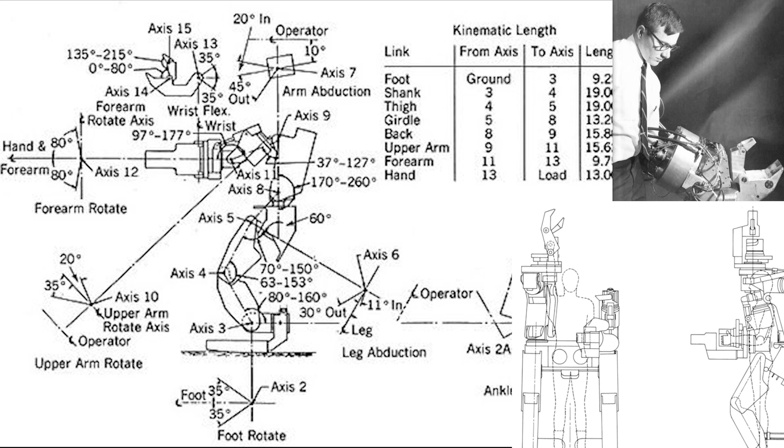My name's Matt Dickinson. As a quick reminder, we are working on the Hardiman project. We are looking at bringing back the famous original exoskeleton.

I've got a couple of things to share with you from my personal research on this project, some really interesting things I never even realized, and also some comments that I've had. One comment I'd like to share, which hopefully appears here, was my favorite quote of the week: 'the OG EXO from the past' - the original gangster EXO. This is very true, it is the first powered exoskeleton that I can find record of. There's a couple of comments about the man amplifier, but from what I can see, the Hardiman is the very first. Definitely my favorite quote of the week, really made me smile when I saw it. I've obviously blanked out the guy's name, but yeah, phenomenal quote.

Anyway, as ever, I'm just moving things around on my other screen.

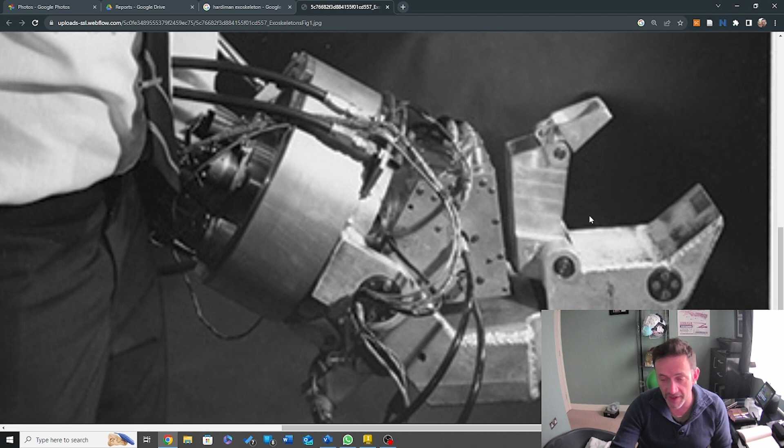I'm going to do that cut, but you've got to remember what we're trying to do at this point is we're not building this from scratch. What we're actually doing here is just trying to establish the size of things. Once we get an overall design together, then we'll move to the next iteration, which is fine-tuning all of this - nuts, bolts, positions. These, by the way, are assembly caps - they've been put on, and they've assembled the actual piece and used an assembly cap to push it into position.

This is because the front of this will have probably been detachable of some type, so you can get in and actually work on the linear actuators, or servos, underneath. So yeah, it's there, but it's something to consider.

Right, so let's get to action. If you followed me last week, well done. Let's take a bit of a reminder. Let's go around the actual hand and take a look. Again, we are not doing the master hand yet, the slave hand needs to be right. You know what, I thought that was going to be quicker. So slave hand needs to be right, so let me just update on this.

And again, if you... oh yes, somebody did post a question, well actually emailed me a question, when I'm referring to the system I'm using to navigate around, my space mouse, what is it?

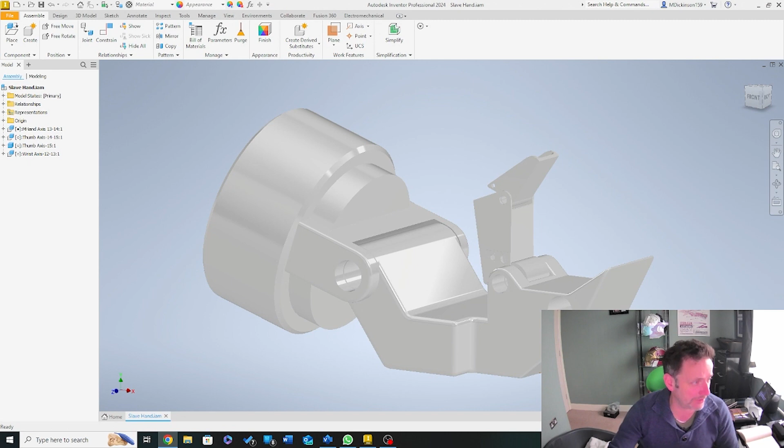So let me just show you an image. Once I show you these images, a lot of people go, oh yes, I remember. Right, so this is the one I'm actually using. Now I'm using this one, and mine's still, well, mine's a really older one, not as sophisticated as this. They've now got mobile wireless ones. If you don't own one, I'm surprised - these are insanely good for what they do. This is what allows me to do this and move around and have a little bit of a gander and look in here, look over there, move over here like that. It's a great bit of kit, and if you've not got it, I would strongly recommend, if you can, to buy one. They are phenomenal.

But the worst thing is they are not the cheapest thing in the world. When they first came out, they were peanuts, but like anything, you kind of go, yeah, when it first came out. Ha! Okay, so let me not digress too much.

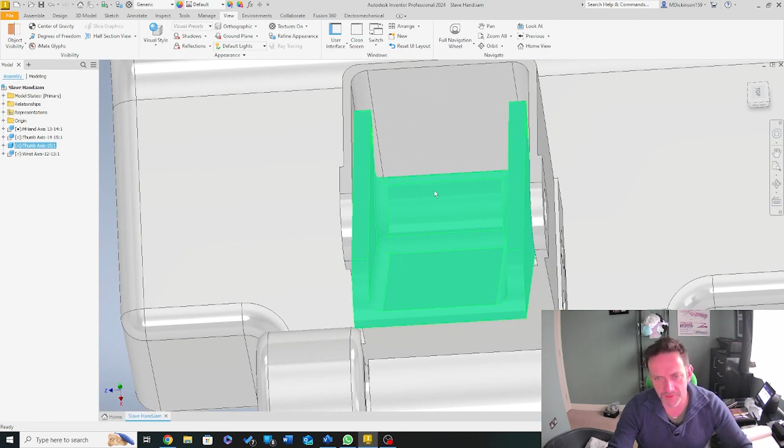Right, see my thumb here. I think this is going to need cutting out. Looking at some of the key things about this, I think this is going to need cutting out, and then this will have a swing arm here that will allow it to push and pull, giving it the full linear actuation servo aspect to it. I think that's what it's going to be, and then what you'd end up with is a bearing in between of here, and then that will allow the thumb to go backwards and forwards smoothly.

However, at this point, no bearings. All we're doing is just getting this into position first. So what I'm going to do is quickly swing back to my original, because if you remember, I've done the slave hand as an assembly, but then I've done the master hand.

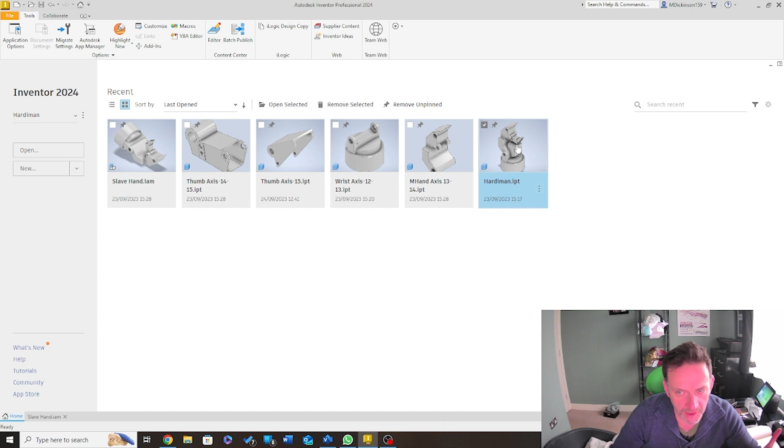For those of you who know my class, those of you who know me, you will know that I know this as base parting. It is known as a lot of different names and different aspects, but it is, for me, known as base parting.

So let's just take a look down. We see here, this is where we were smart. So if I come to here, and if I go... and now all I need to do is make these non-visible, or invisible. I know, yeah, I think I'm funny, so don't judge me.

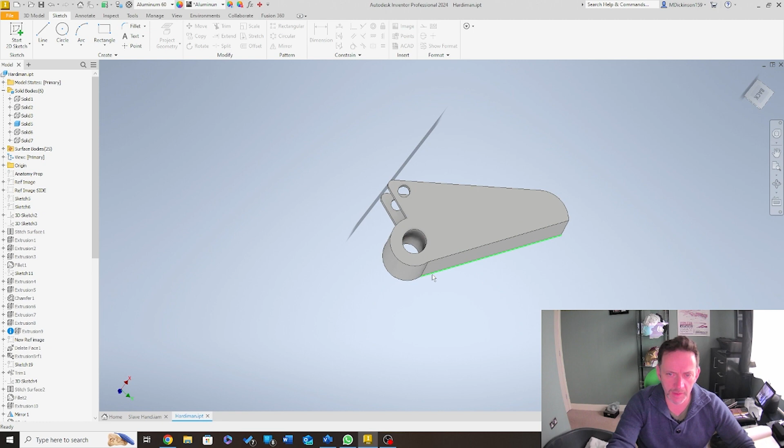Right, so what I'd really like to do is create a plate at this point, see, here to here, this is dead easy. And what I'll do is, I'm just thinking actually, the length of this thumb, I suppose it doesn't matter, because that's going to be an adjustment anyway. I am going to, before I start chopping that thumb back, need to check it first.

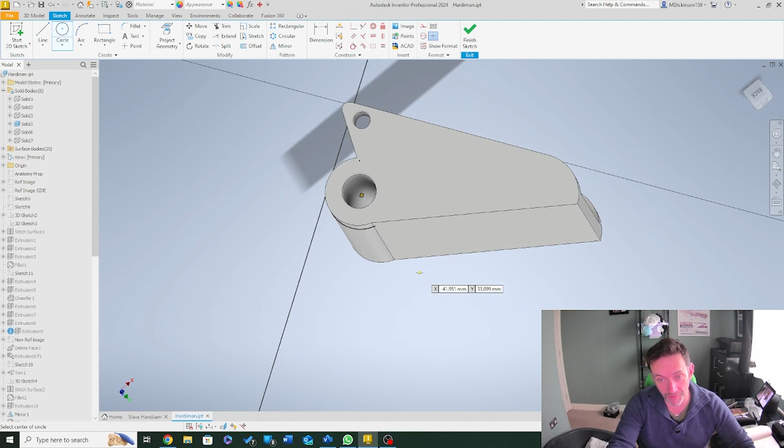So I'm just going to do a sketch onto here, and what I will do is try and find where the hell that went. There we go. This is because technically there's other things on here that obviously we don't see, but because we were smart when we engineered this, it's on there, but it's saying, oh, I can see this, and you kind of go, yeah, no, but I don't want that, and it's looking as if to say, well, do you want that? No, I don't want that. So that's all this is really doing.

Now, it's interesting here, you see how this flows in between. I'm probably going to suggest that I'm going to cut this right back, do an extrusion right back, and then perhaps put a fillet on it.

You gotta remember at this point, I am making that bit up, and I hate saying that because it just feels like a real fudge. In many ways, what I'm doing right now is a fudge, which I hate. Anybody on the channel now, you'll be thinking, do I really want to be connected to fudging it? Not really is the answer.

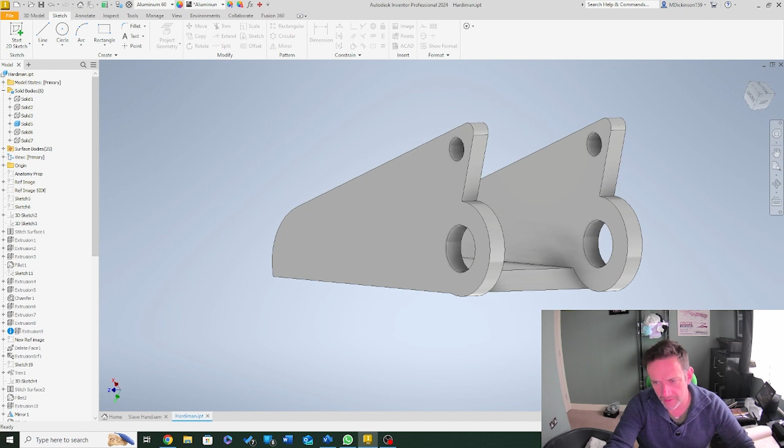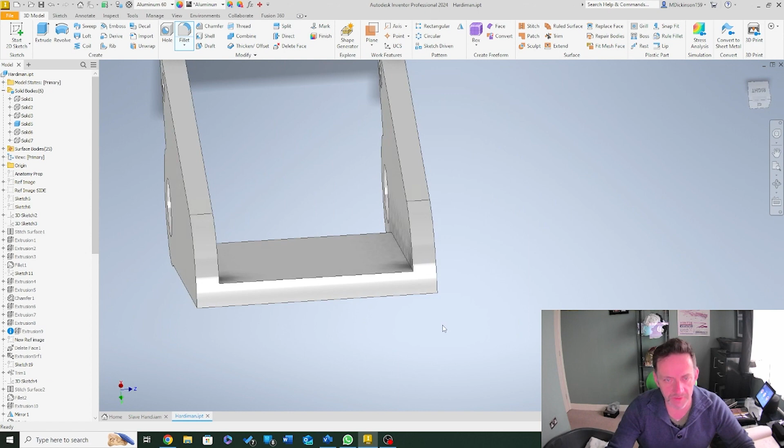But that is what I think we should be looking at, which is them two plates in between it. The one thing I know for sure is the thickness of the overall would have been the same. There's no way they'd create multiple thicknesses for a single part. They were smart in the 60s, very smart, but they also tried to make things as easy as they could in some aspects. I'm not saying any of what they were doing was easy, because it wasn't. But they were trying to make this so it wasn't over-engineered or over-complicated for something they really wanted to prove.

The other thing I'm still not sure about is this section here too. I do have some images for us to take a look at. These are burned, badly burned. But we've got some good spots here that we're going to use today, which are these angles. We now know it's actually a 30 plus to minus 30 degree rotation.

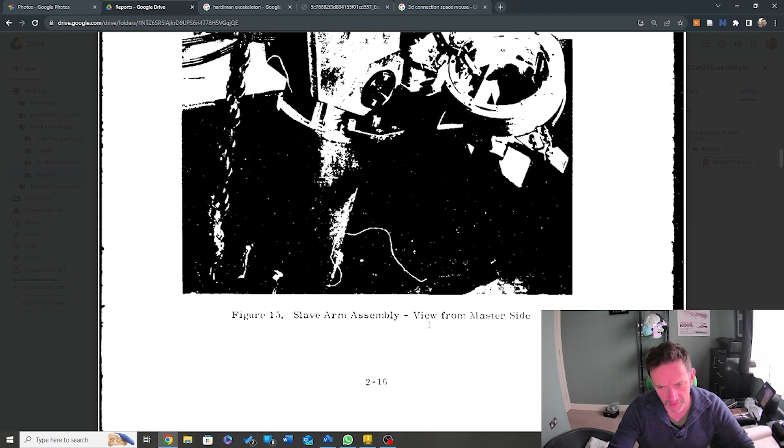What's this? Slave arm assembly from master side. We just don't get a full arm, we can't actually see much there at all. A little bit more is on here, but anyway, let me get back to where we were. So when it comes to the thumb, I'm just not sure about that spot yet.

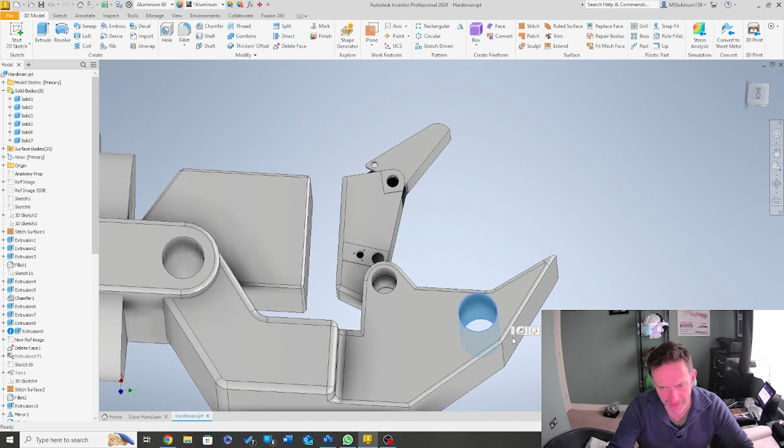Right, so let's bring everything back in. There we go, so we've got this freedom here. Now this gap, I'm going to have to try and find as many images as possible. I think any interference on this gap would have come from the linear actuator. This here, I suspect, is going to need to be sealed, and we're going to use it to break down an overall assembly.

But let me just save on there. Now you see here where I'm saving, it had to take a minute. That's because if I go to the slave hand assembly, see how the lightning bolts are down here? What this is saying is, whoa, hang on, something's changed. So if I come here, you kind of go, oh yeah, look at that. So if I just go boom, what it will do is update it, and now we've got the updated version of what it should look like. Some systems will automatically do it and keep these things live, some will not.

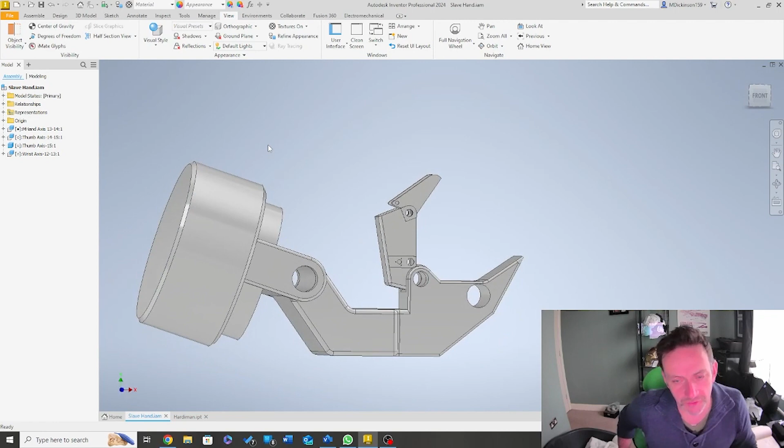This is where we are up to so far, and I just realized something else as well. Now, this was something I noticed way too late, and this bit we may need to think about. See here?

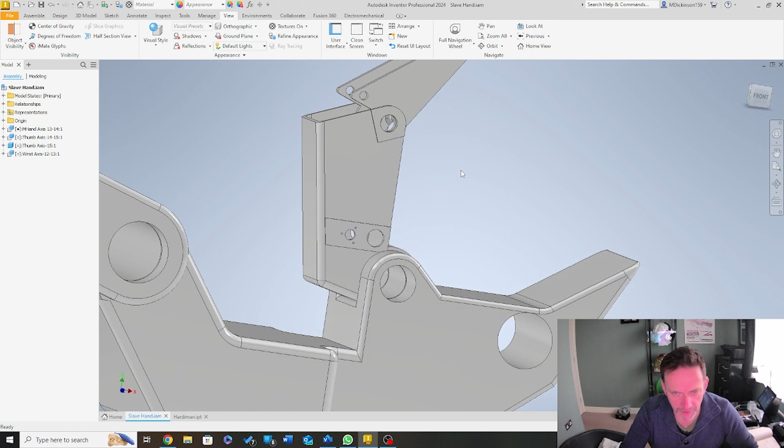Now, if we actually just take a look at the actual piece that I ended up making, right, this is the actual piece. What I did is I removed a smaller section here, because one thing that dawned on me quickly is that as we're moving forwards, the servos in this case are either sitting down here, or there's a servo sitting underneath here that controls around this axis. That's the bit where I wasn't sure, and for that I just cut that out. But I'm going to leave it there because I think that's going to promote a bit more discussion. We need to find out what them servos were to know what type of an operational window space we get.

Now, granted, in what we're doing here, even though we are recreating something which is incredibly old, to make this, we're going to use linear actuators, and we'll actually use some up-to-date linear actuators. We will have a real working version of this. However, I don't want to compromise what was actually being done here. Again, what we're doing is trying to flesh out how this was, and with more evidence that we find, we refine this and refine this and refine this.

Right, so before I start rabbiting on too much, let's get into the next phase of this. My real focus here now, and my real hope, is this.

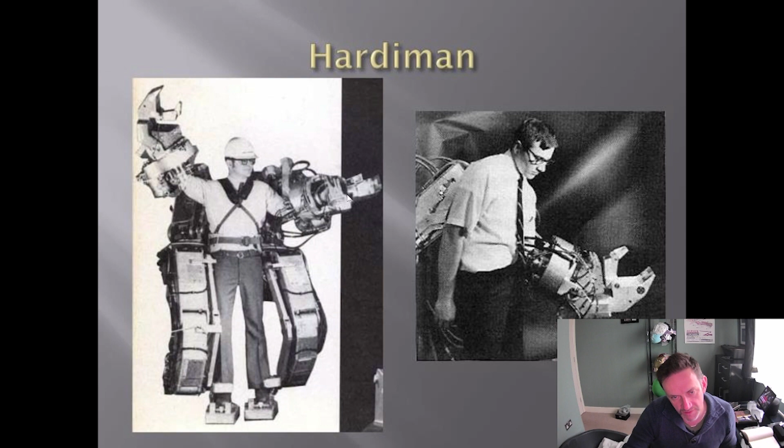Which is where I'm hoping we're going with this. Where we're going to have to go with this until we're pointed out any differently, because I think that is how it's working. I think there is a control box there, and I think what people do is they put their hand into it and it goes through that particular spot.

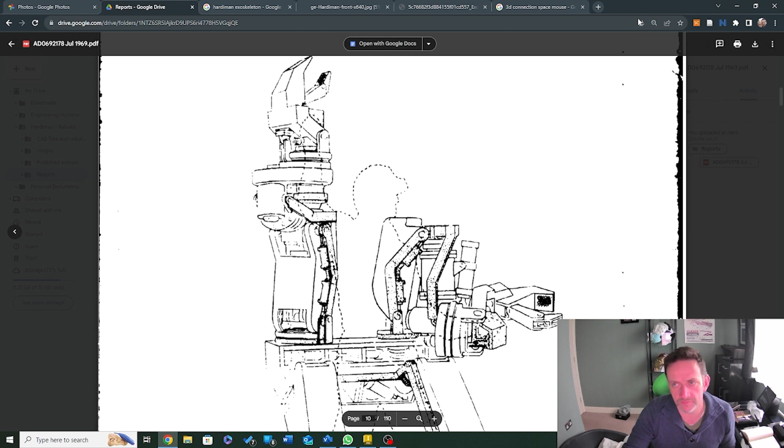So if we consider the drawing here, and this was my ultimate one on this - if I just come back, let me go into the reports, just go back to the top because this is a drawing from the actual reports, it appears quite a bit there. So if we consider this drawing, if you look there, we've got a square-like section here, and we also have a square-like section here. I think it's connected to the wrist, so I think it's actually connected to this. And I think that you've got that fuzzy bit there because it can move with it.

So based on that approach, if we just phase back to here and look at this, what we're now going to do is start to flesh this out some.

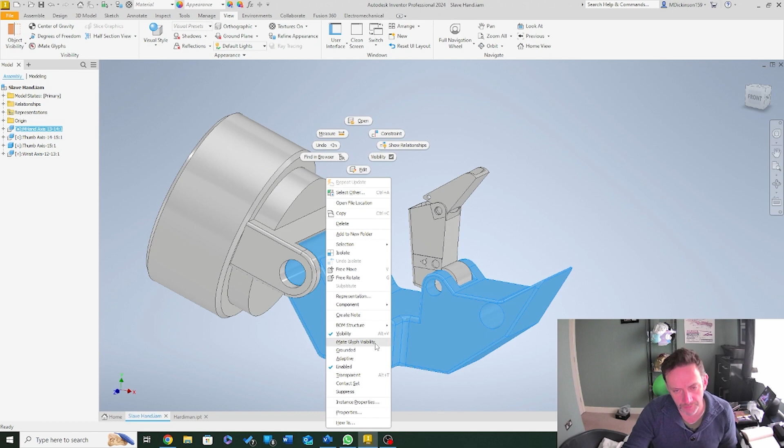The other thing is, I think these now will actually be tabs. So my point is I think this section is going to be cut out, and you're going to have tabs on each left and right. So if that's to be the case, then I'm going to move into the actual component, and what I'm going to do now is move across to my overall piece, to my centerpiece here, and then sketch.

Right, so bringing that round, and then going to project my overall sketch onto this particular edge, like that. And I'm going to bring in my component on here, and it should allow me to find the center point.

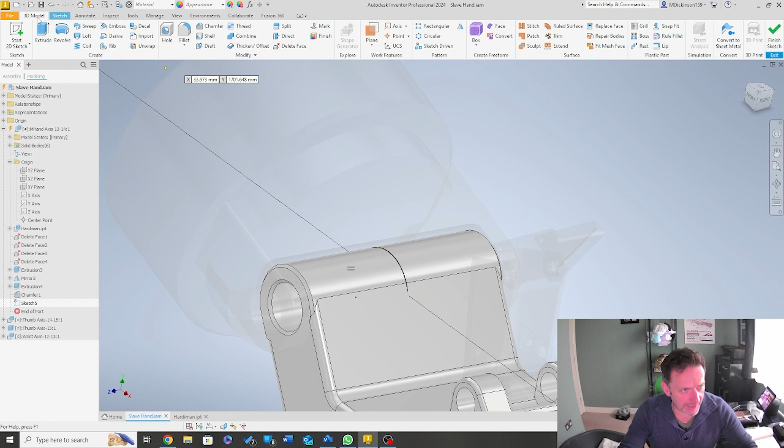I mean, really, this is going to need to be smoothed out, but it's going to be good enough for me to just get the gaps between, as long as I can control my thicknesses. Because what I'm trying to do, I'm going to maintain this just so everybody knows. What I'm actually trying to do is get an overall together, and then we start to refine.

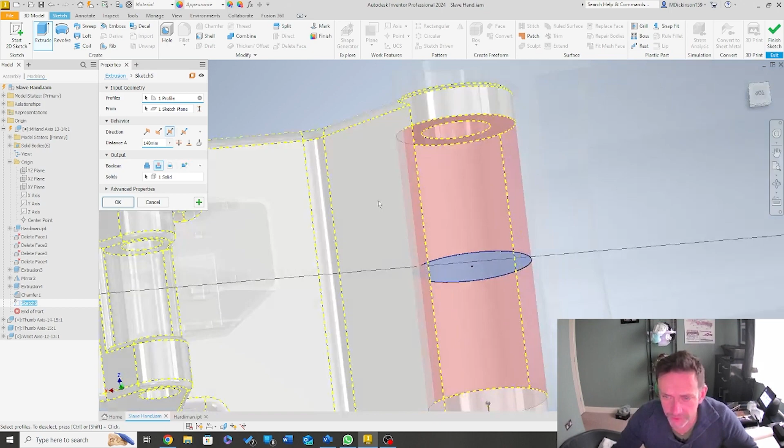So those of you watching who are UCLan students will know that I'm talking about this as a final project. What I'm referring to is getting this to a detailed design, not just a first concept design, because that's what we're doing here. We're just producing that first initial concept of the overall thing. And really, when it comes here, I may even just edit that sketch.

So what we really want to do with this design is make it as realistic as possible. We get this overall structure together, and then start to look a bit deeper as to, okay, so this works, but why? What's good for this? How could this be better? Is this a true representation, and how close or how far are we right now from the kit? Is it going to be something we can use?

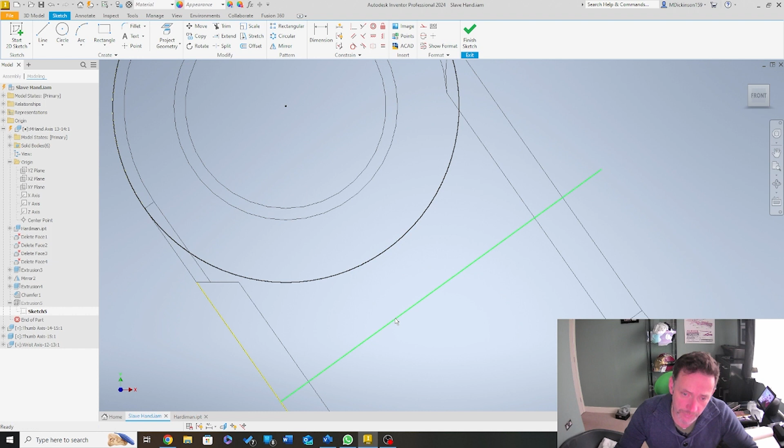Because the truth is, this as a project is going to get used. I am going to be talking about this to everybody under the sun who will listen, and I just want this to be as close to the real deal as we can. So that's why I'm spending all this time just going through this again and again and again.

So I'm just going to trim on there, and trim on there, just close it out, and then the system's going to go, you've done something stupid. Oh no, it did it straight away. Okay, so if I just tab this out and let's go realistic, tab this out, and that's where we end up here.

Now we've got this spot here. Now this is where it's going to become a little more interesting, because what we're going to have to do is figure out how this thing mounts. Because if you look across to the actual process, I can even see that I made a mistake there, but you look there, there looks to be some type of flat plate mount piece here.

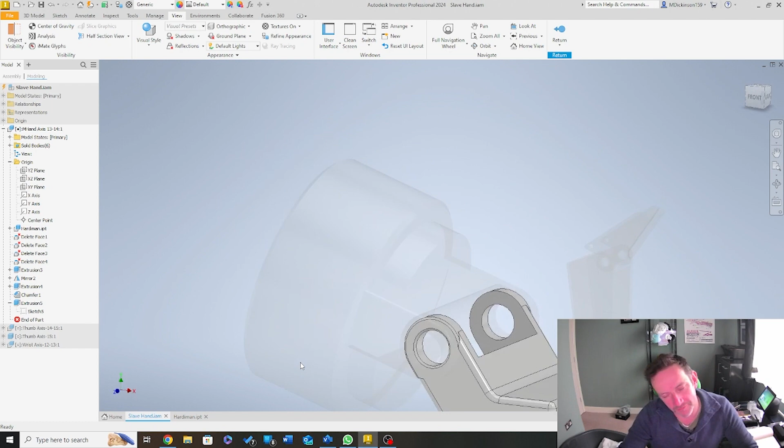It's awkward really, just because it's almost fudging, isn't it? And it's not nice, it's definitely not nice. It's caught me off guard really, just because when you look at that, maybe the decision I've just done there is not going to work as I'd like it to. In fact, I'll come out of here, and I'm just going to phase off this for a moment. I want to just go back to my original piece here and look at where this is.

So if we look at the 7th piece, that's the 7th piece. So if I hide the 7th piece, that's what we get. So go visible.

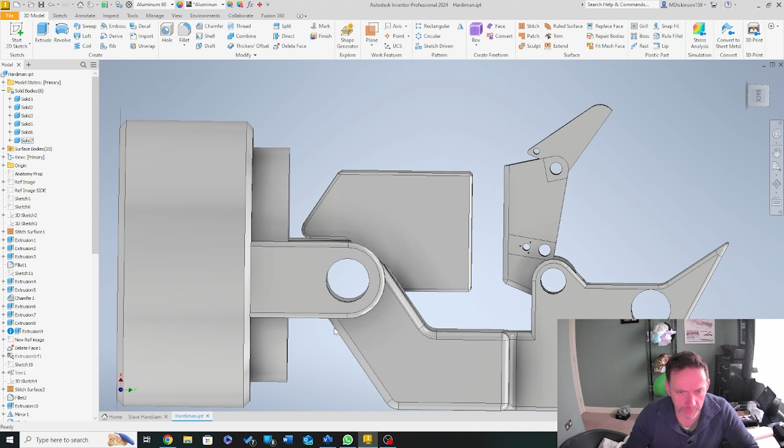Because my thought is, if you look at the actual front piece on here and you look here, what we actually end up with - I think that's why this was angled. Yeah, so if you actually look, I think that's why this was angled, because when you look at that degree between there to there, it's within that remit of its ability to turn, and that's what I think it was. And granted, what I've done here is not quite right to here, so we're going to have to make some changes here anyway.

I mean, you look at that, it's roughly to the same height as there, but it's just too far. I mean, the issue I have here is that distance there - is it too far? Is that what it is? Because it looks relatively too far for me. Does that?

Or based on there, if you look at that key particular point, is this not high enough? But you look at where the thumb sits, and I would say it is high enough. This control box is going to be a real pain in the backside in many different aspects, but it is something that does need to be right. It needs to be right, and yeah.

Looking at what I've just done here, for example, on the actual main piece itself, I think that's not right. So I'm going to come back in and delete that out completely.

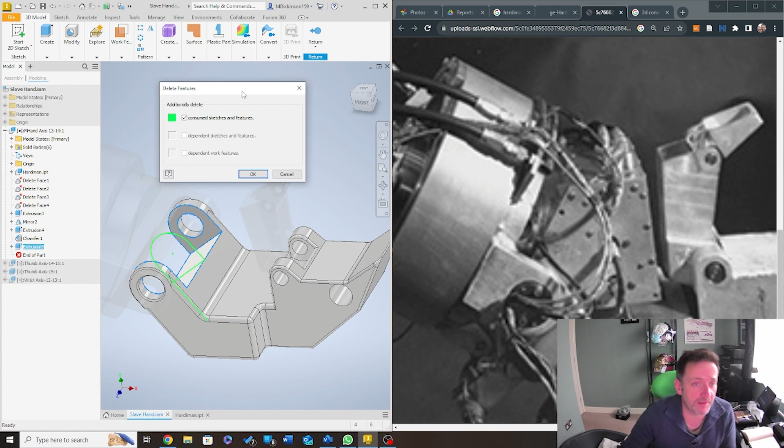If anybody's done this in SolidWorks and other things, when you delete something, it just goes, done, boom, gone. In Inventor, it says I've got things connected, do you want to delete them as well? Yes, I do, and that'll just pull everything out. I suppose it comes down to your own preference with this, but I do personally quite like that.

What I'd like to do is try and model these out a little bit further. So I'm going to come back to here, down to my actual 7th piece, which sits here. I'm going to edit this sketch, come onto my sketch, and this is the piece I'm talking about.

The only other thing we're looking at is, if you notice, this is straight, this is not. So really, on the straight, this would actually sit over here, and that's probably why it looks a little bit offside. Trouble with this shape is it isn't flat, it isn't a straight linear shape, which, I won't lie, you kind of sit and go, oh well, that's bloody irritating, isn't it? And yes, it is. It irritates the crap out of me.

So I'm just going to pad that out a bit here. I know for sure this is not quite right, it's just because when you look at it you do kind of go, yeah, okay. This is heavy fudging, I mean this is like super fudging. I don't like that, but I think these angles are here just because you can move around it, and it's to stop collision.

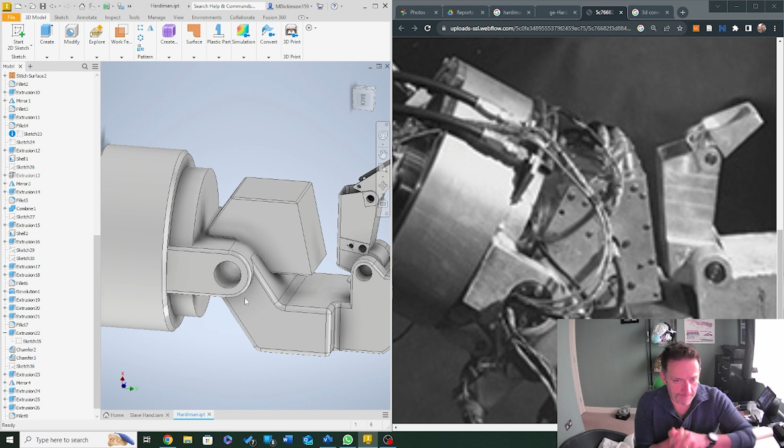So I'm guessing that's going to be the case. Right, let's do this, let's go to that next initial phase.

Oh yeah, look at that. I've just realised that comes into here and that comes over to there. That's not right either. Okay, my goodness, what was I thinking? So it's this sketch entirely here, I'm not happy with this at all.

So let's consider this, we know by lines. If we were to put this in lines, I'm going to say that was a bit of line, that would be a line, that would be a line, that would be a line, and that would be a line. Just a pentagonal shape, yeah, five, pentagonal shape. And you look at where that sits, it remains within that pentagonal shape.

So let's just check here: 1, 2, 3, 4, 5, 6, 7. Yeah, it's not the right shape. Damn, damn, damn, and more damn.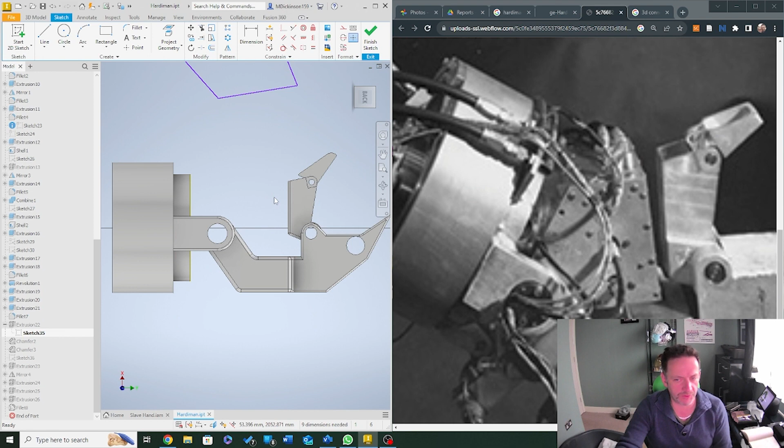Okay, so, oh you know what, balls to it. So I'm going to bring that back in, and this is mega fudging. I'm just putting that down to here. This edge will definitely sit roughly over here, this is going to sit to about here, and this is going to move down to about there, something like that.

You look here, it's still not quite. But look at that, you see that line? That says to me there's something underneath it. But I'm not fussed, it's alright, we can do that.

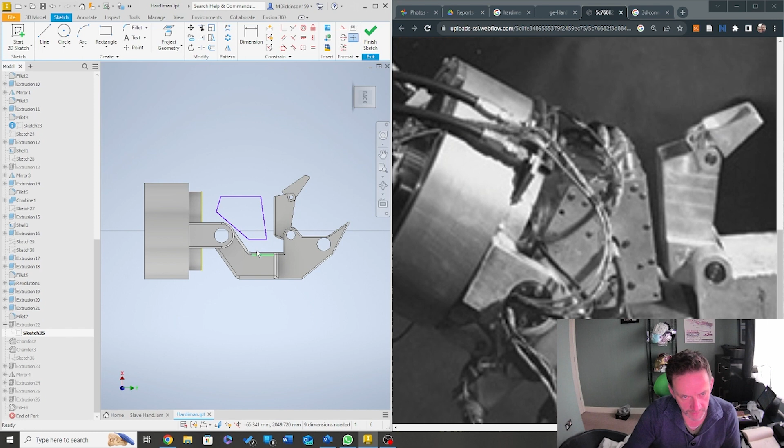So you look now, and even though that's still not quite right, it is starting to look a little bit like it should look, which is always a nice thing. Bring that in down a little bit more to there, and then bring you over here a little bit, bring you down a little bit, bring you over here a little bit, and tab that over, bring you over here a little bit, and what you should be starting to see is the overall shape.

And my arm here, oh look at that, right, see it, there, I've got it, see that arm, look at that arm, it's too long, it's way too long. There's many offensive words I could be saying right now, and I'm holding it all in. Oh damn, damn, damn, damn, damn, and more damn. Quite alright though, but it just allows me to at least see where that's gone wrong.

Bring that end to there, and then over to there. Something like that. Okay, so let's click OK on that. It's going to error out. This is just because I've now caused some major issues.

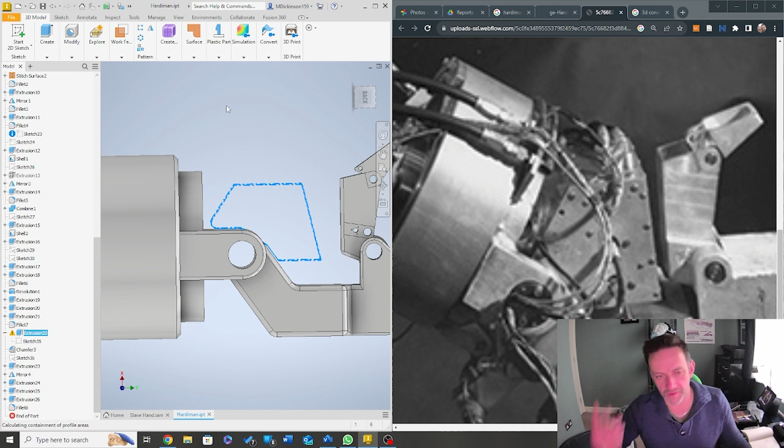It's going to come onto here, then say I don't see the sketch, I don't see what you want me to do. All I'm going to say is use that one instead, and go OK. And if we spin this out, that is what we get.

I'm going to quickly offer a quick chamfer. I'm only putting chamfers on here just to give it an overall feel for me. Looking at the key points here, let's go even lower, it's going to be the tiny little things, but just to give it some depth. And that is hitting that fudge factor. I'm just putting it on here to add them in.

Okay, so if I then confirm there, we've now got that. It's a little bit closer. I must admit, I did mess around with this to death in the past, but it is looking that little bit closer, I won't lie.

Right, so what's my other parts? These ones I'm just going to hide for the minute. I don't want that. I'm just going to hide that for the minute. Don't want that.

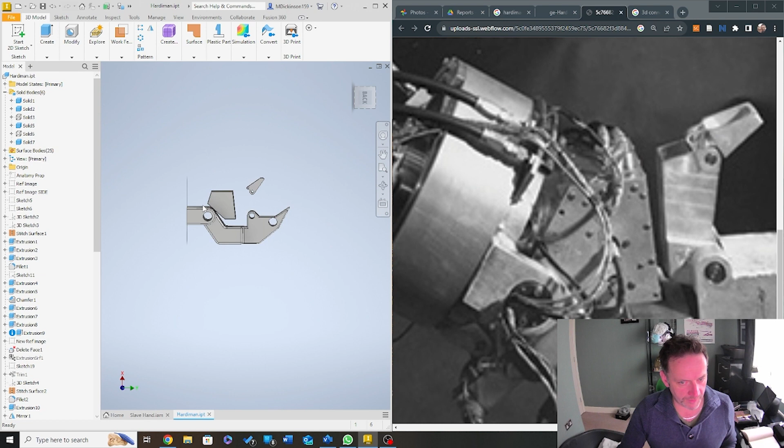That one is my interesting one. This is the one. And if you look here, the concern now is, do we model within here, within the master piece, or do we now leave this and go back? And there's a piece of me that thinks, you know what, let's just model straight piece to this.

Looking at where that sits, it's almost down the faceplate itself, so it's almost like down to here. So what I'll perhaps do is model a piece across that, but combine it with just this piece. It does mean the assembly we just put together still needs some changes to it, but we are cooking with gas, boys and girls. This is looking quite sweet.

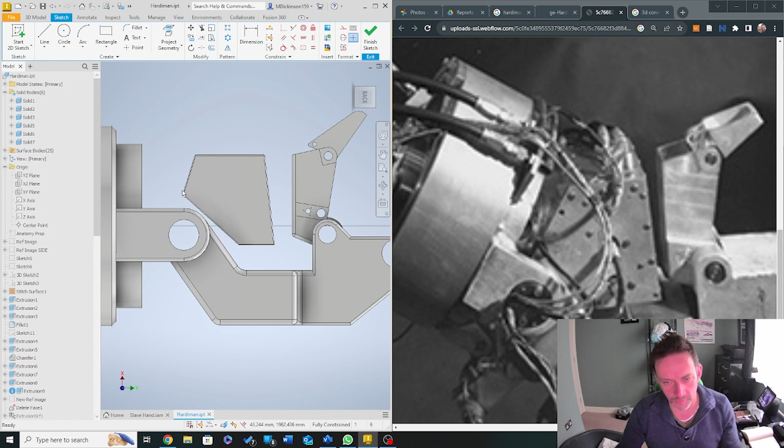Because I have battled with that stupid control box for weeks, just looking at it and looking at it, wondering where the hell that shape is coming from. The one thing I know for sure is that this is a control box because of all these key points around it. Look at that, it instantly tells me multiple points of assembly. If it's multiple points of assembly, it means there's something in it. So if you look here as well, that flat plate tells me that even though it's on this axis, it's assembled to it. So we're gonna use that angle edge there, and build it onto this face.

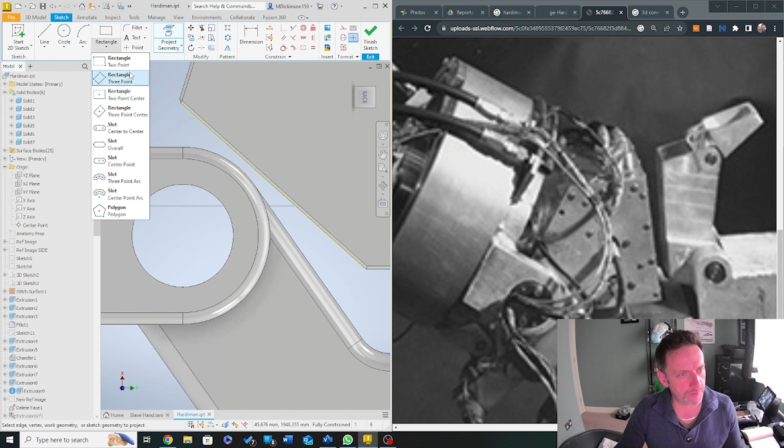So let's do it. Project from you, and then I will do you to you to you, something like that. Luckily, I think the system should allow me to at least extract these key points at angles here, but I'm not going to trust it, I'm just going to take it. So I'll go you, and you. See, now we've got that closed area. That is going to become my assembly point, which I think is what they've done.

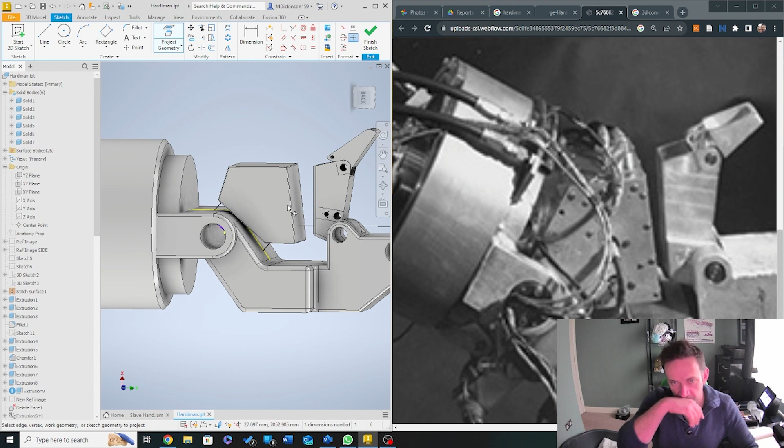And then we can probably, this is so exciting, start to get the position where the master would sit. I know a lot of people have said to me, master? Yeah, it's just the description of where your arm would sit into the actual response unit. So your master to slave behavior. It is cool, very very cool. I'm super excited.

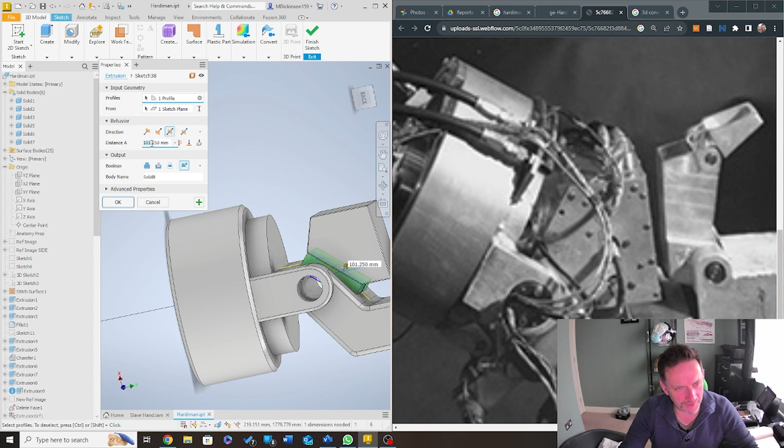So, allow me to pick that out. And that seems very small. Oh, I was looking at this to go, what, 1.1 millimeters? I thought something had gone horribly wrong. I'm just going to 100 mil. It's going to slightly sit on the inside, and for me that's quite nice because it's right.

So now it's asking me what body it's going to connect to, if I can do a combination. So it wants to know who it's going to be connected to. I'm going to connect to just this body, so it will still retain a change between these two. And that's really what I want. It means that when I move into the assembly, it should now give me some insight as to whether I can use it as two separate pieces. I'm pretty confident I can.

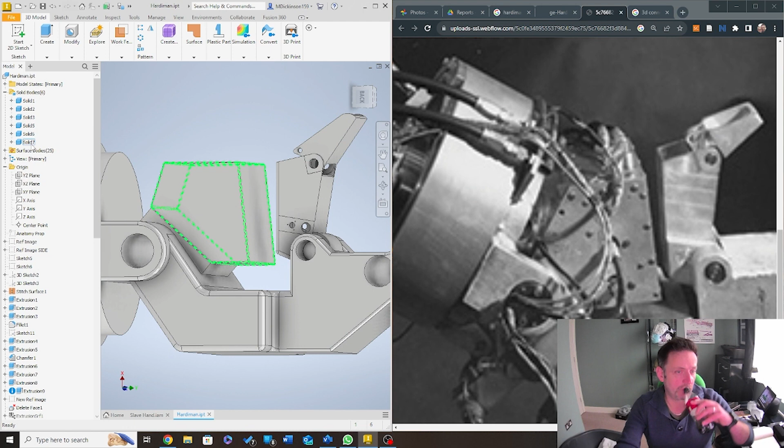So here's the awkward bit. We're just gonna leave it, so here's the awkward bit. Right, so I mean, look at that, boys and girls. Oh my God, I'm impressed. I'm so pleased that we got this far. This distance here is massive, it's huge, and it's way too big. That's where our problems are. Perhaps the height between these two are a little bit big, but it's a good blooming start, might I add.

I can bring that down, but with the changes that we just made, damn, this is easy. This is easy. Right, okay, here we go. Let's return. Watch this, watch it.

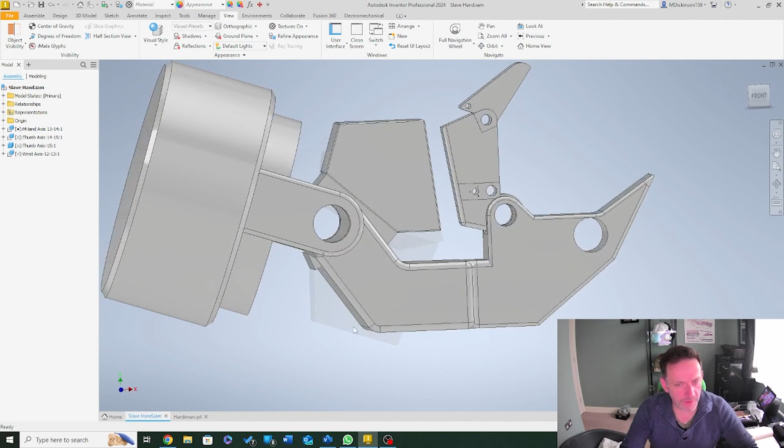Whoa, wrong button. Now you look at that. So we do have a slight issue. Look here, and then we also have here.

This is because, remember originally we were cleaning out components? Well, I was going through removing stuff. That's what we've got here. Now this is an error delete. So if I just go edit feature...

So here, and then click OK, accept. I'll just delete that out completely. And now let's go modify, delete, go component here. Just because I've got to update since I've been changing stuff.

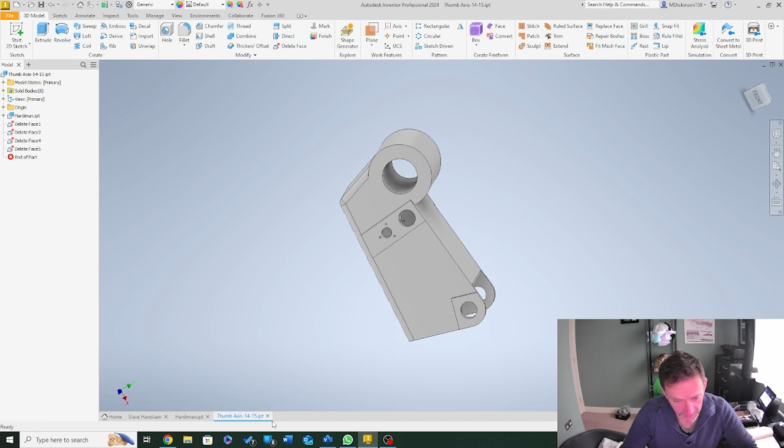Let's close that, and then we have another one here, which is here. So let's go to this one, and we've got it here. Yeah, you see there where it's still being kept on. What I'll do is just delete that, and then I'm going to use that to delete the new one.

Oh, that's naughty. Look at that one. You see that? It's alright, we can get rid of that too. Let's bring that out too and click OK. Boom. Now I am a happy bunny.

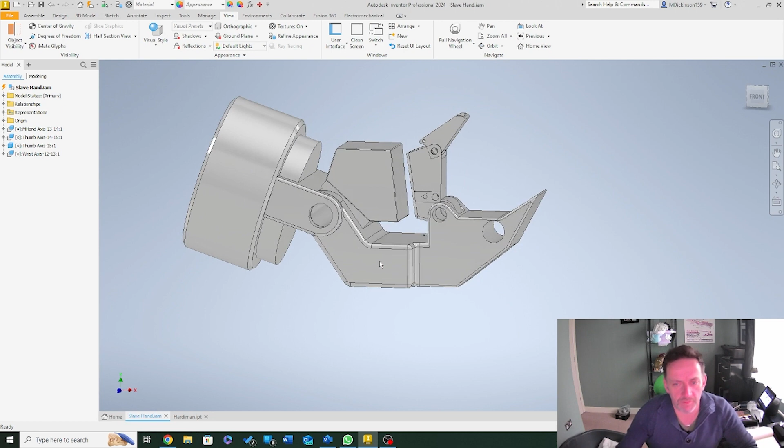I'll bring that back out. I'll do an update. Right, so this is on the slave hand assembly. So this is how our assembly is looking. You can instantly see there is a problem, but that is not an issue. We can fix that because we are that good.

Is that black and white? We are doing this, and we've been doing this right. So fixing stuff like that is literally child's play. Anyway, let's get back to it.

Look to the left, we've got our lightning bolt. Let's lightning bolt that bad boy up. Hit save, and then go OK.

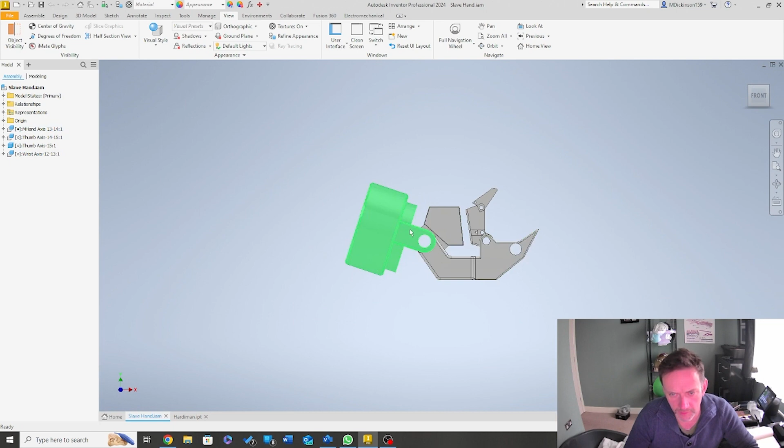Now, I am super. Oh, hang on a second. Let's look at you. Look at the axes there. That looks really off. We'll assess that in just a sec.

The one thing I'd like to quickly do is look at that axis piece there, because that's going to cause a problem. But because of what we've done and how we've approached this, it's not hard. We can actually just fix this quite easily as well.

So is it on the slave? Is it on the master? No, it's not on the master. I can't remember where that cut came from. Is it on a delete?

Oh, look at that! I'm genuinely flabbergasted where that cut came from. It'll have come from somewhere, and I've just totally missed exactly where I was coming from.

So, to bring this up to speed quickly, I'm just going to put... I'm not happy with that. That looks like it's completely off center. Why is that completely off center?

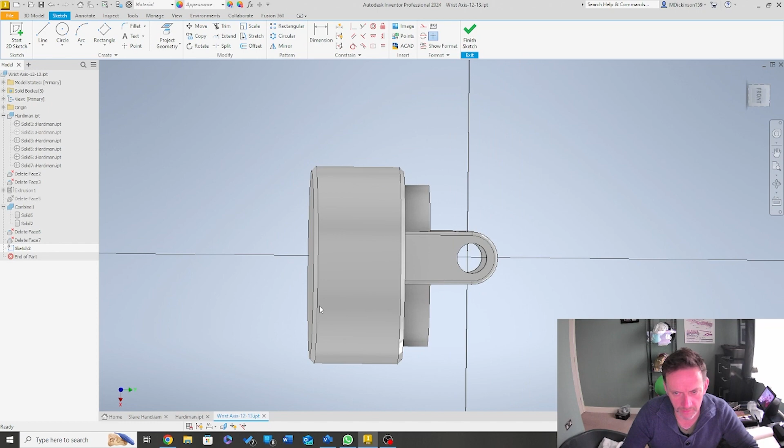Okay, I need to come back because we look here. If I come back across here to here, yeah, that is off center. That is not what I'm after, so I'm going to come back to my original design, come back across.

It looks like it's been a slight mistake from myself. Bet you I've been rushing through this. So let's get on here, to there. All I'm going to do is just find where the monkeys did that get put. We've got to make that change anyway.

I'm going to edit that sketch, because now we know needs to be. I'm actually going to drop that down. I'm going to go to perhaps... ooh, I'll go 60. It's quite a drop.

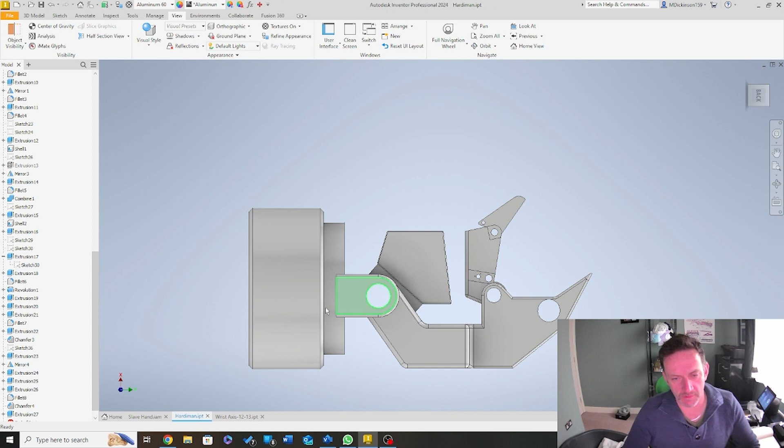And let's just look at my, because this is a revolve. There's the revolves. Let's just take a look at these revolves. Ah, that's what this is. It's the wrong blooming axes.

Look at that. Ah, look at that. Oh my giddy aunt. That is not good news at all. It's okay, nice to find it.

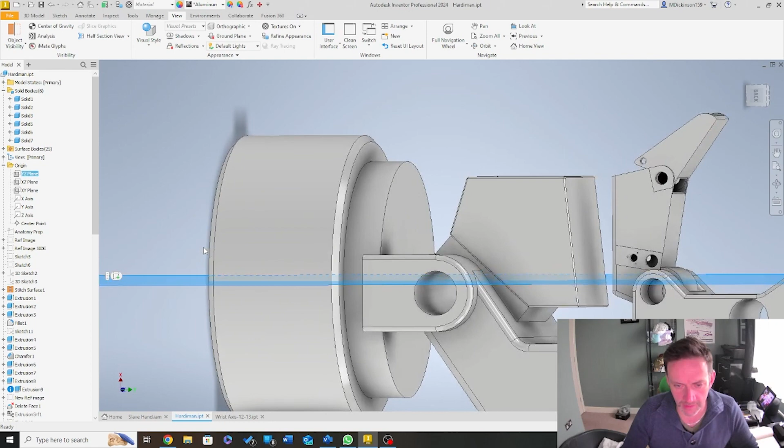So I'm just going to remember this of, let's go revolve 1. I'm going to come up to here, over here. Oh my goodness. Tell you, that is not a happy outcome for me.

So all I'll do now is I'm going to project this and take it from there, and I'm just going to place something in. I'm going to have to add a point. So I'm now going to add within... can I still put it on a curved point? I probably can. I'll just add an axis. No, in fact, let's add a point to here.

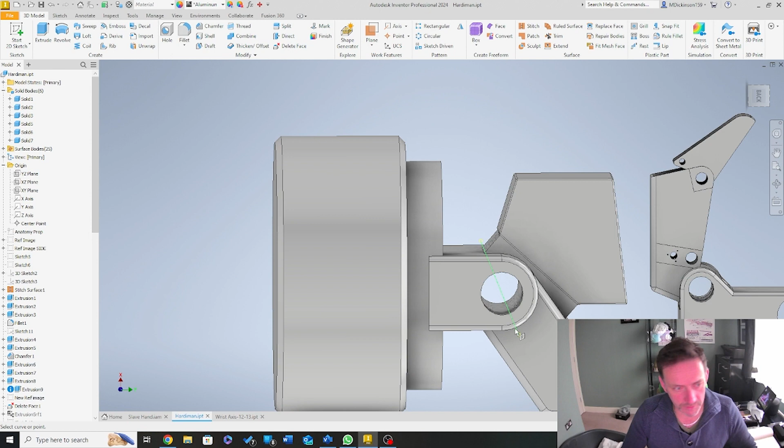So I've gone to there. The reason I've done that is I just want to use something to tab onto, because that needs to be within the right axis and it isn't, which is quite annoying. So let's get you on here, and then I'll set the point. I'm not having a good day with these point things today. Right, let's try something else.

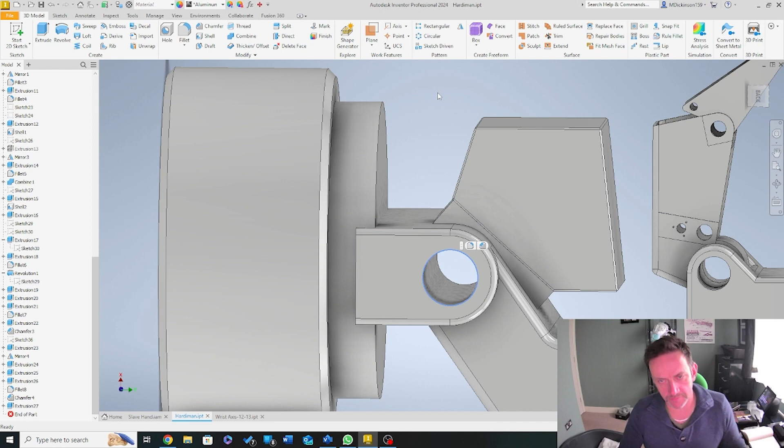Just want to remove the axes. So point to spheres, it's not a torus. Let's try a torus on a hole. It won't let me put a torus on a hole. Yeah, okay, I am just being really lazy with this, to be honest, but you know, let's just go.

Okay, fine. Right, I'm gonna have to do this properly, which just means I'm sure somebody in the comments will say, 'Oh, you could have used...' And yeah, if there is a straight one, please do let me know, because that's just me being a wally, really.

There we go. So now you see there, I put that on here, and my revolve was all the way up here. So what I'd like to do is bring it all the way to there. The reason I do that now is, well, somebody told me that you don't have to do this for Inventor, but I've always done this, so it's just what I do.

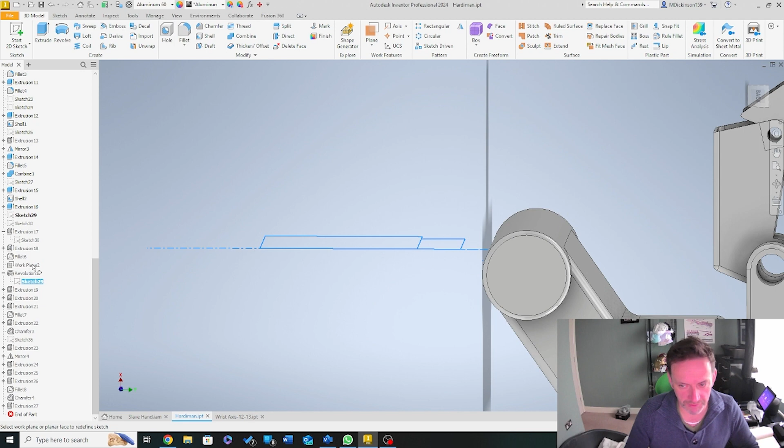So all I'm going to do now is right click and then go to redefine. What this now allows me to do is kind of go, sorry guys, I put on the wrong sketch. So what I'm trying to do now is, oh.

My goodness, I've just realised something else as well. So I've actually put that based on a size of this hole. Okay, so that's actually not going to work. Okay, how interesting, how interesting.

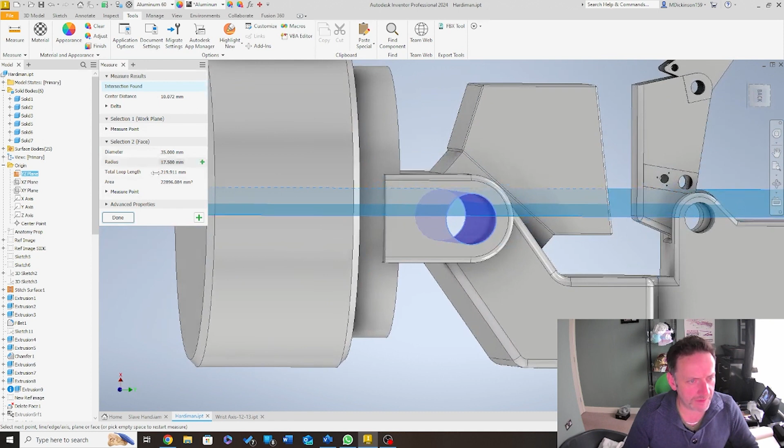So okay, what I'll do is turn on this sketch and plane, sorry, and then I'll go view, tools, and measure. So I'm going to take it from this plane and go to, it's kind of just between there, so I'm looking for my delta. So I've got my diameter, delta, so it is, oh my god, 10.072 mil. Brilliant.

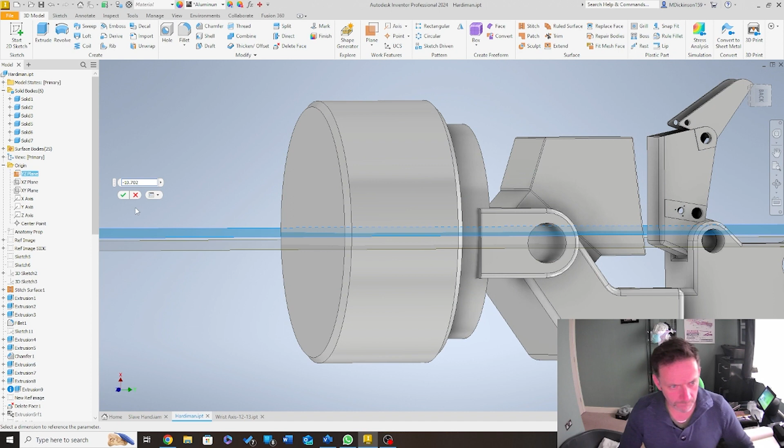So then all I'll do is now add a plane. This is such a bad way, 10.072, but it's something I didn't notice. 10.702, and I'm just going to push it downwards, and I'll go minus, and then go OK.

So I can hide this, and then I'll go down to my new plane, bring it up to revolve. Oh, revolves there, and I'm after plane 3. So if I go right click, I'm just gonna, because really if I'd have just been careful when I'd gone along, this wouldn't have happened. This is actually my mistake, which I hate to say. I'm sure a lot of people will be laughing now.

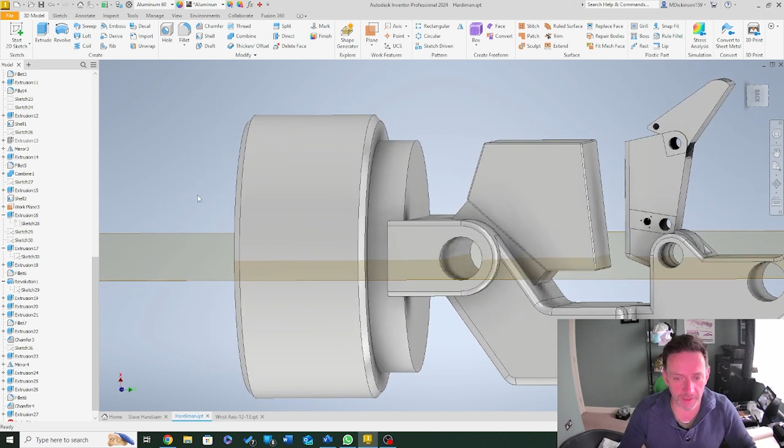But you see now I've done there, what I'd like to do is place it onto this plane. You see there? Sorry guys, that went really quick, but you see what it did is it's now centralized. This is quite nice now. So if I quickly just take us back to the actual piece, see there, it's now looking that little bit closer to how we wanted it to be.

But yeah, after here I will upload an updated version of that. So apologies everyone if you have gone through the pain of getting this working and then realize I'm now saying, you know what, I've done it wrong. Kind of like, yeah, we're now gonna kick your ass.

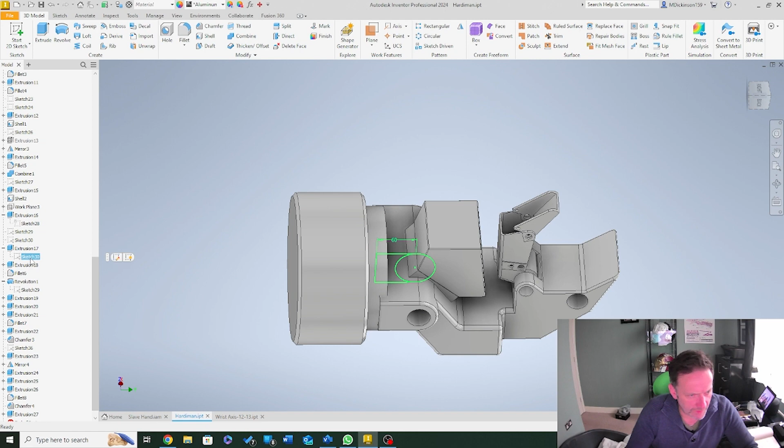Now, what you'll notice here as well is it's on to sketch 29 now, and this section here, let me just see if I can find it, it's here, is on sketch 30. Now, what I'd like to try and do is bring my sketch 29 down to here.

The reason I'm going to do this is if I go on to sketch 29 and then go to edit, I should now be able to see that extension, and that's what I need to know, what that extension is. I need to make sure that it will allow, that it will be part of it. And you can see there it's actually too far away, so all I do now is, sorry, I literally just opened that up and closed it back down again, just for rabbiting on.

This is where we're going to need to really start doing some homework on this, figuring out the size. So I'll stay with this for the start, I'll go 110.

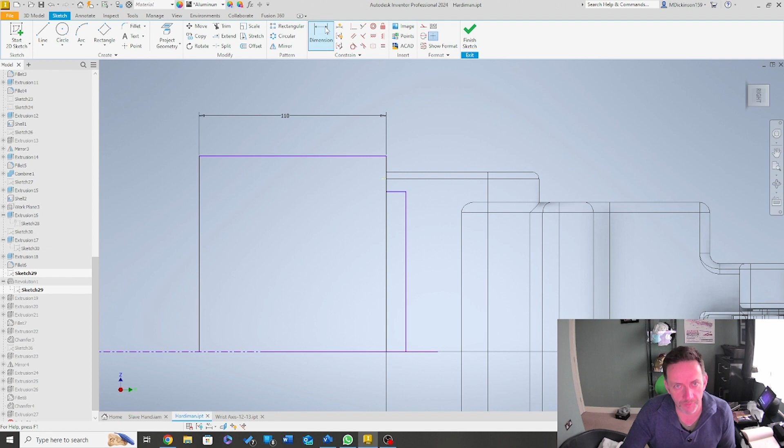Yeah, you can imagine what my Saturday night's going to be now, reading all about the Hardiman.

With that in mind, I'll jump a little further forward, let's go 30 mil. It's not massive, but then let's revolve that. Boom. Okay, so now it's a little bit closer, and I'm feeling good about this.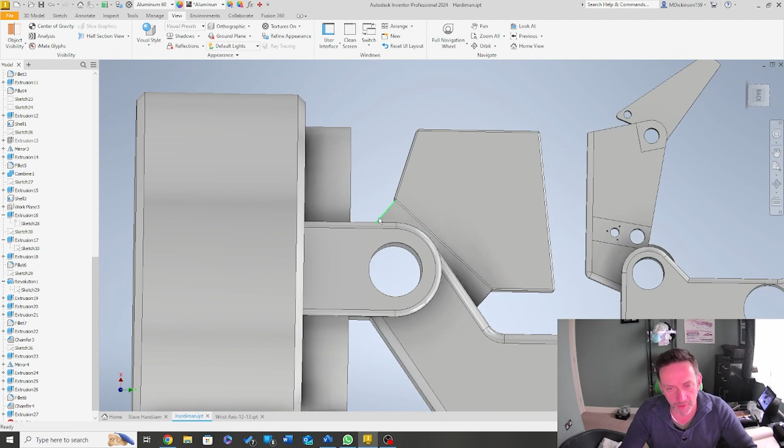I don't know about anybody else watching this, but I'm feeling pretty good about this. We got that little bit more closeness. I even think this can be reduced even more.

So I'm just going to push back up to 29. Oh, look at me getting that wrong. Let's go 30, and then bring you back and go 50. I think this is getting a little bit skinny at this point.

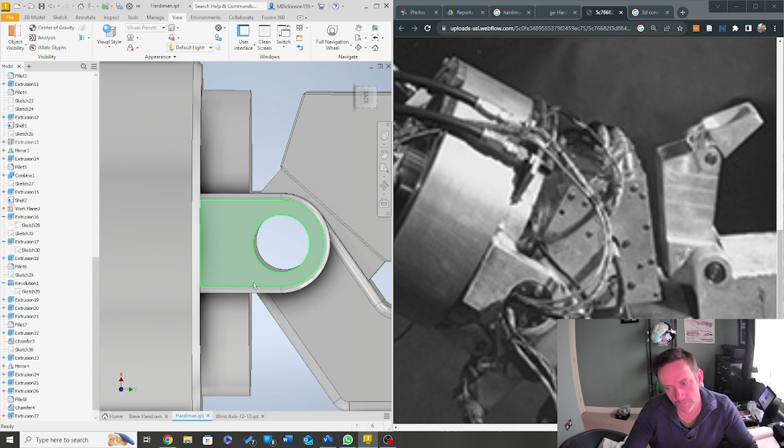It is, but looking a bit nicer though, isn't it? The other thing is, have you noticed that is almost in line to here? So if that's almost in line, that tells me that on my sketch 29, this might even sit more like that.

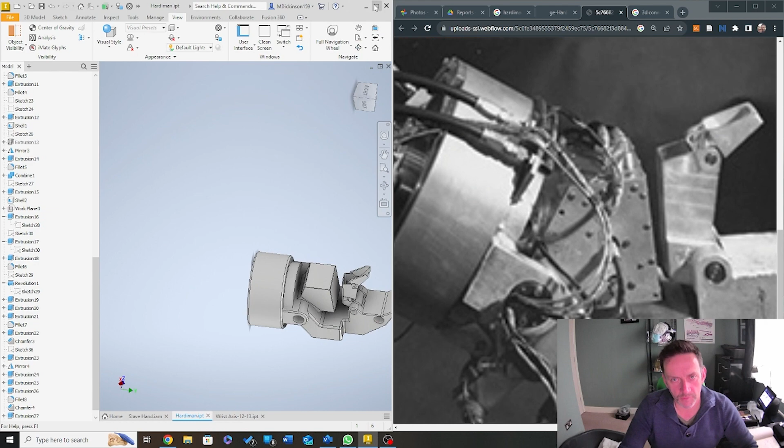Oh, I don't know. Oh my goodness. I think maybe I'm getting a little bit caught up in semantics right now. I think let's move on, or else I'm going to spend the next half an hour just taking a look at what's gone horribly wrong.

So let's hit save. Okay, so we've now got the control box. This is cool, so let's get back to the slave hand. We've got the control box in on here.

Now, the one thing I'm not happy with is the control box. The control box is automatically on this arm. We do need to be moving forward smartly, so with that in mind, I'm going to delete you out.

And I'm going to go back to deleting a body, and I'm going to bring this in and delete that out. That's how we need it. This is the point where I think that will be screwed to it, so it's going to be mounted purely to it.

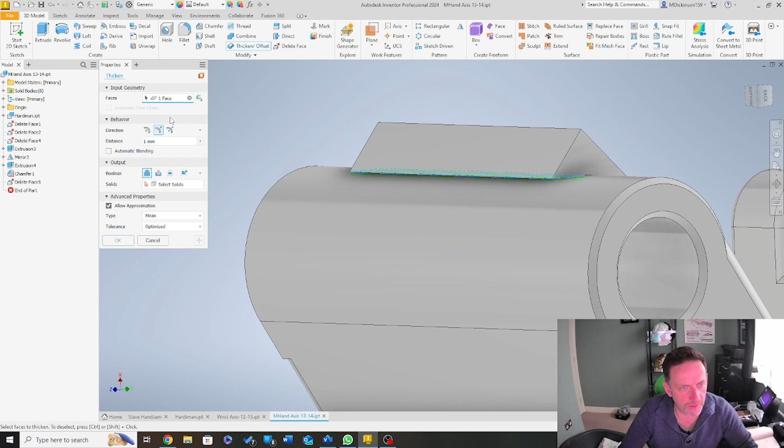Oh, look at that. I'm glad we actually checked that. Not happy with that. So I'm going to thicken that out, just bring that into play, and let's go 5 mil.

So you should just bring it completely in line, and then go make a combination to you. So let's make you to here, and then go OK. Right there, so then at least that's connected.

We will revisit that, I need to do some homework on that. But I'm just going to go OK and then select save.

Right, so now we need the control box. So I'm just going to update on my slave. Right, and let's do a new.

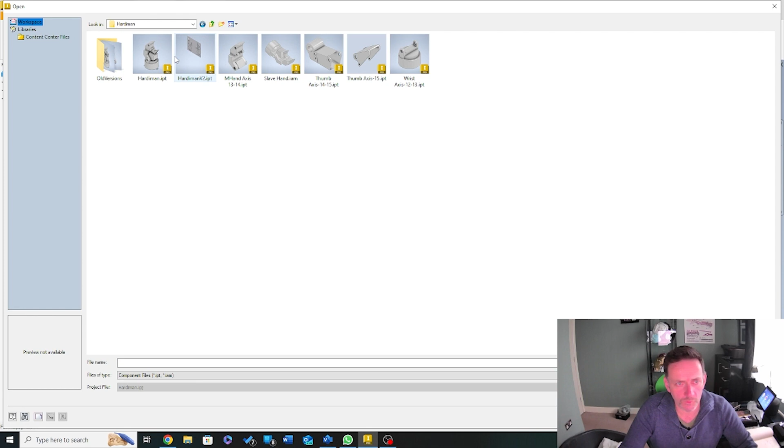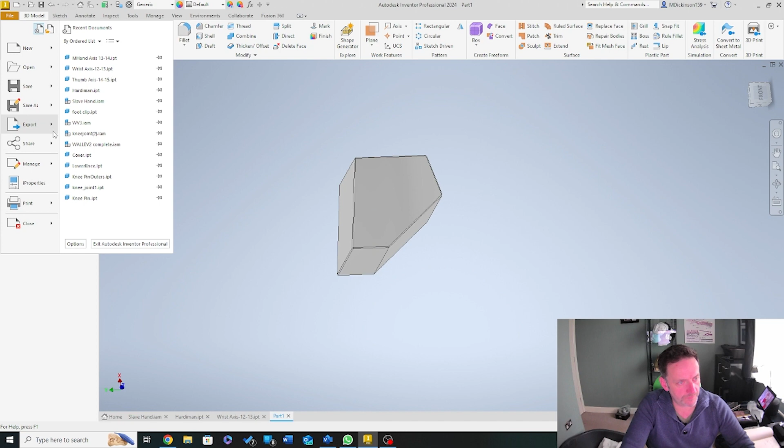Okay, so I'm going to go save as, and I'll call this control box, and then save.

So now we got it. We can thin this bad boy out, we can make it as small and thick as we like. At the moment it is solid, but it won't be for long.

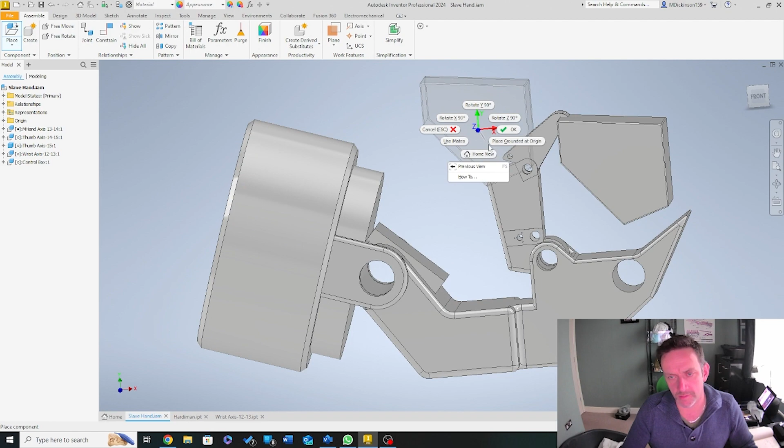So let's just quickly place this to position. I'm going to place, and I'm going to go control box, and I'm going to go open. Get into position there, and then click OK. So now what I'd like to do.

Ooh, look at that. That's not good. I think that's going to have to be trimmed down.

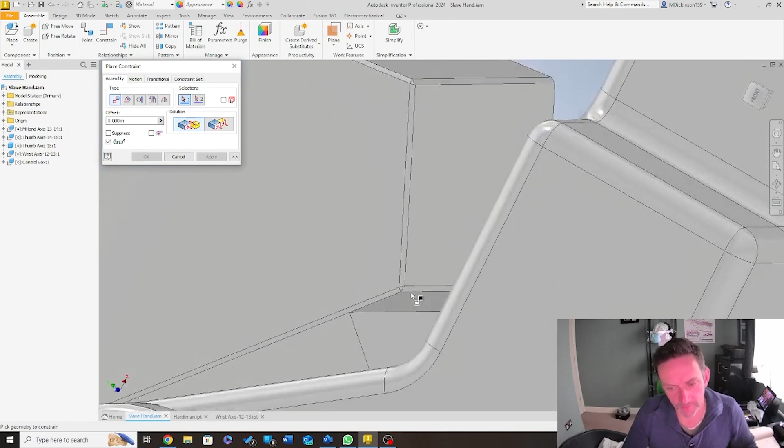Now what I'd like to do is quickly go to my, it's actually not a joint, it's a constraint. I'm going to go U to U, and then click apply. Let's go U and U, apply, and then finally, hang on one second, bring this down. And I'll go constraint of U and U, and then apply. So that's now in position as normal.

And what we can now do, which is quite slick, is look at that the right way around? Oh my goodness, I think that's the wrong way around. I know for sure that that needs trimming out.

That needs changing entirely. So I'm just going to quick save on there, click OK, then come back to my Hardiman, and I'm just going to quickly get to my last drawing, which is here. Click Edit.

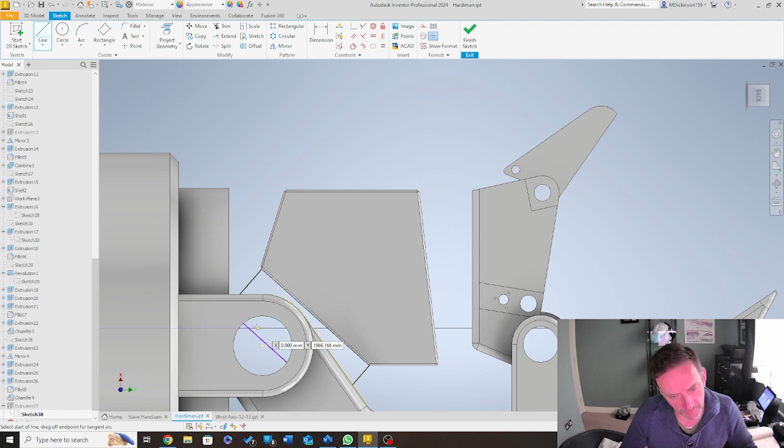And looking at what was there then, it's going to be less, definitely going to be less. So we're going to mount it. I'm going to try and just base this as real as possible. Even there you can see it looks to be less. So I think it's going to be more to this particular point on this angle here. And then I'll click OK.

So at the moment it does nothing just because I need to edit the feature. And see how it's now selected onto two features. It's because it now notices that there's actually two pieces within here that it could select. So I'll pull you out and then click OK.

And that now allows me to go save, go back to my slave hand, update my design, click accept, and there we go. We've got that a little bit more on there. So this can now move and not have collision.

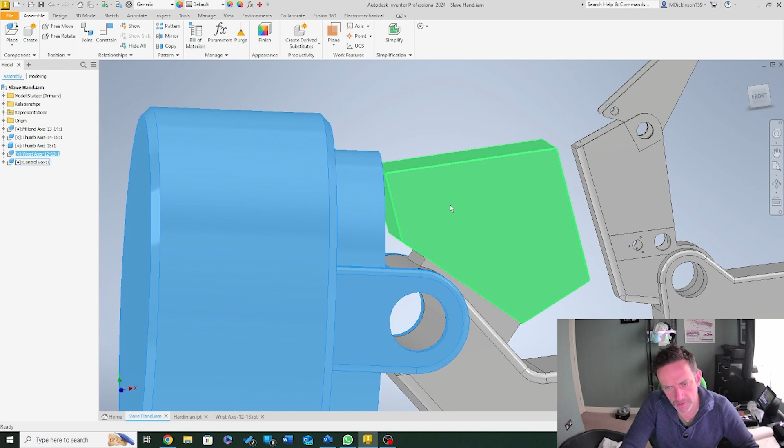This, however, now will have a hole that moves across, and this will now get to a position where we can actually cut out the master. I think the master then will go across, and what we'll do on the next video is we're actually going to use the dotted line from the original plans.

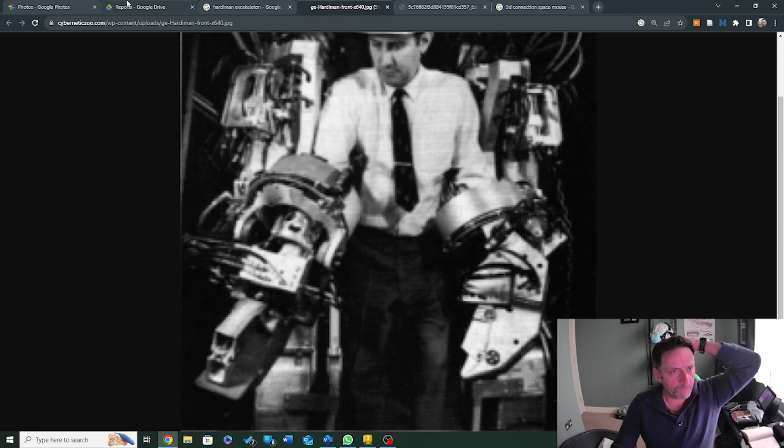Which let's get back to the original plans. We're going to use the dotted line from the original plans, these dotted lines here, and we're going to use that as a proportional gauge piece to allow us to cut that out. We're going to use a body arm that I've actually got to allow us to set this to a particular size. We would use that as a section to cut out.

And then we will roughly have the very first regurgitated version of what was the Hardiman arm almost back to life. Then what we're going to do is go through the next iteration. The next bit is the super exciting bit, the detailed design. What we're doing at the moment is roughly getting this together.

And so let me bring this back, and let me just first bring you all the way back up to the top. So what we did is we have just reconstructed the next initial section. We've now got the control box in position. It sits in the correct point. It's going to need a couple of bits cutting out.

I get that. We have a rough idea of how this thing is mounted. We have a rough idea of how this thing is going to be used. We have a rough idea of how the whole thing all sits together. We've now basically got a very first version form of the slave hand. The slave hand was the initial big test.

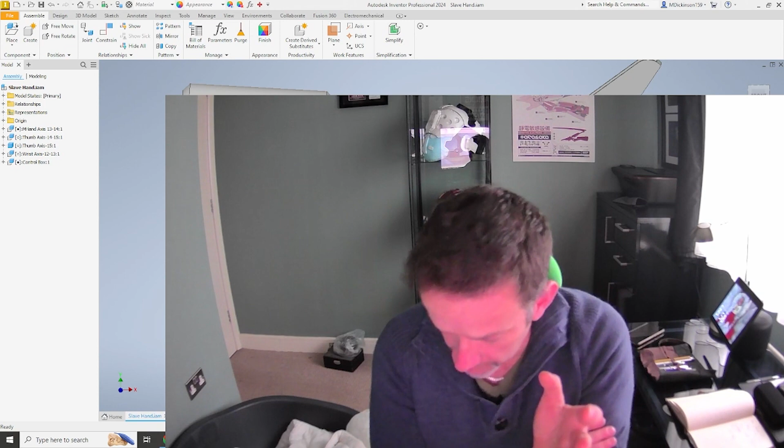And I don't know if I noted this in the beginning of the video. One thing I realized and learned by reading about what had gone on during the testing is there are real videos out there of this thing actually running, and I've looked and I've looked and I've looked, and I've not had any luck as of yet.